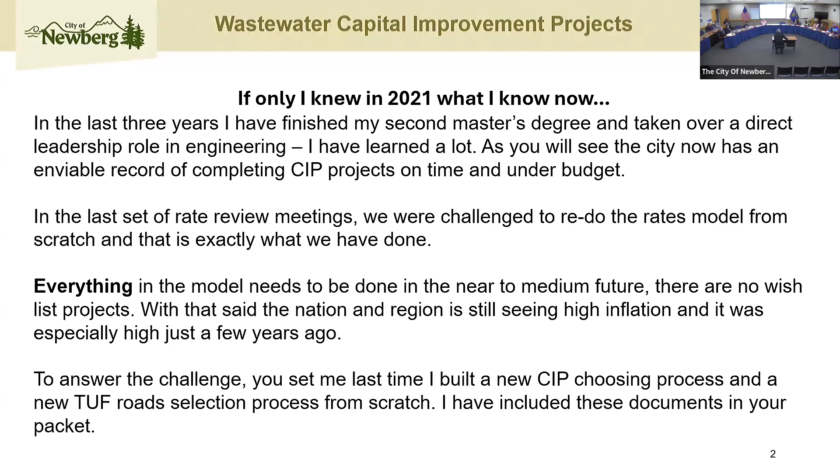To answer the challenge you have set me, we have built an entirely new capital improvement program choosing process from scratch, and that was in your packet, as well as a new TUF, that is transportation utility fee, road selection process, and I included those documents. One difference from this model and the last is that we have not cited specific projects beyond the first 5 years, except for the known factor of the needed water plant. We have put a placeholder for expenditures that we are sure will come, but we've not added granularity beyond the near-term 2 biennium horizon, because we cannot know what the priority will be. This is a more intelligent and flexible approach. It lets the city tackle things as they come up.

There will be no more adding projects that we may never need for a given decade. So perhaps you'll recall things like the redundant water intake have been removed, and other things that we cannot know for sure that we will need in the near future.

The city continues to work on debt reduction. If we can get rid of our current debt that heavily burdens wastewater, we can avoid adding more debt, the city can pay for infrastructure without interest, and that is a no-brainer. You may say, what progress has been made on debt reduction? The first item of debt has already been retired, and it's only 3 months early.

But the second piece of debt, the one that we've been working towards, the communications tower debt, is going to be paid off in May. That means we will be removing a line item from your utility bill, the communication line item, 2 years early. And then we're going to continue to work on the next piece of debt, and so on and so forth.

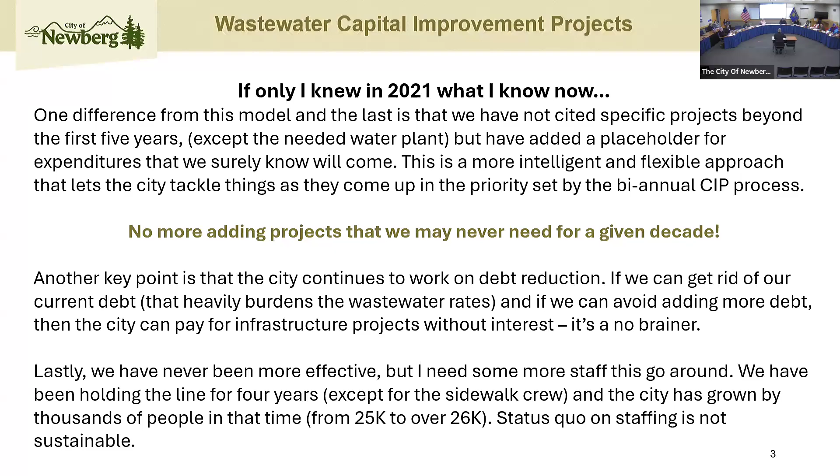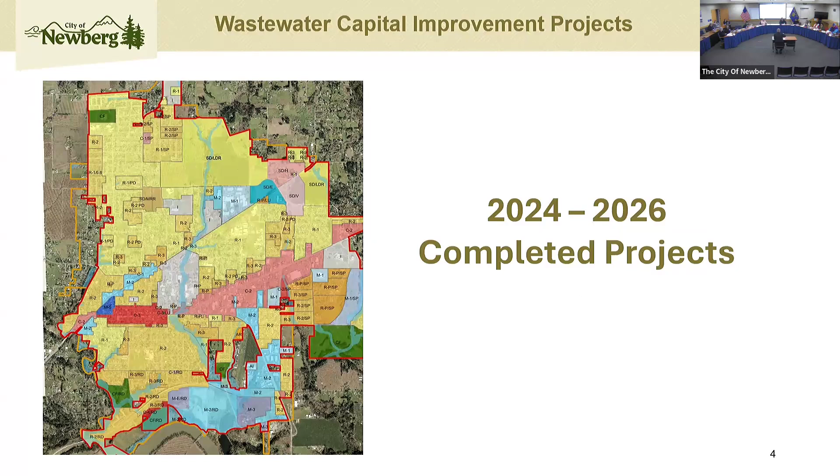First, completed projects. You are unaccustomed from previous meetings to hearing about completed projects, and now you'll get to hear about completed projects. The programmable logic controllers, which upgraded the wastewater plant. Expense total for the first biennium was just over $1 million. Its system development charge eligibility was unfortunately zero.

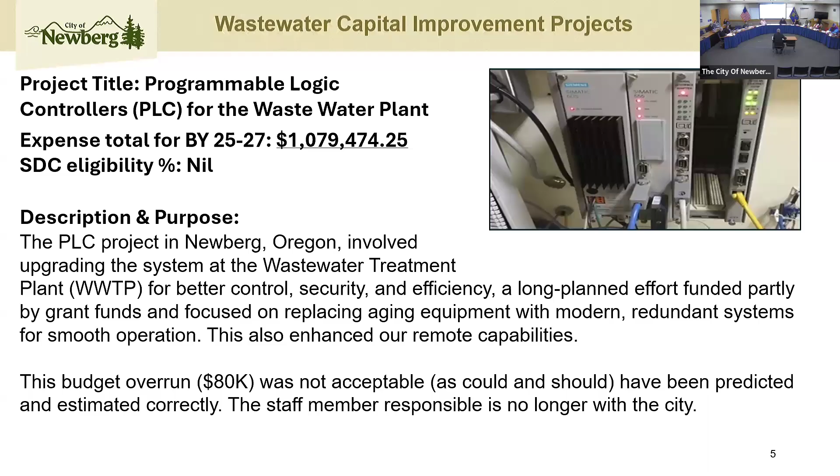It involved upgrading the system at the wastewater treatment plant, and this budget overrun, it was $80,000 over budget. It was not acceptable, and it could and should have been estimated more accurately, and the staff member in question no longer works for the city of Newberg.

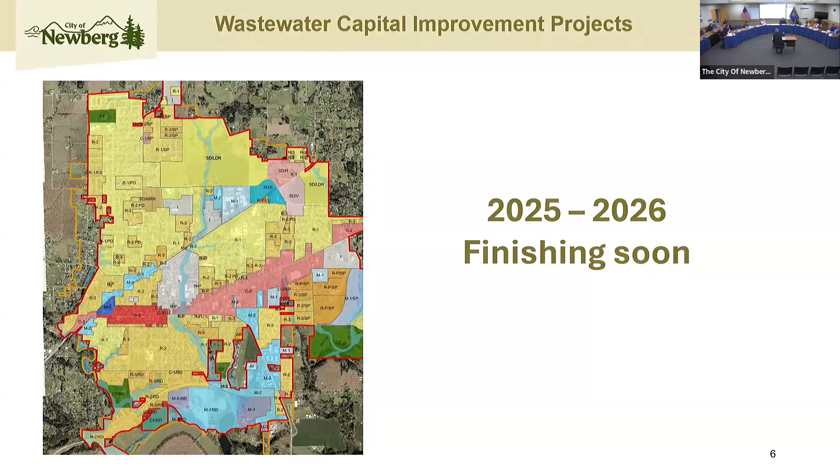And now, finishing soon. Each meeting, we're going to go through the ones we finished or are finishing soon, and then the future ones. The I&I study and report estimate expense total for the biennium is $340,000. SDC eligibility is nil. The I&I study refers to the city's inflow and infiltration.

This is critical because it will enable us to know where we should direct future I&I project dollars to do repairs. And we have finished collecting all of our flow meter data. We are compiling it right now, and we'll be working on that report. We've also completed another component of this, which is a smoke test, which has indicated some cross connections that we need to fix. And that will be coming to a wrap very soon.

The row of things you see lined up are flow meters, which we didn't have proper manuals for, but a former Intel employee that we hired, who is a genius, figured out how to make them work and communicate with our system effectively despite not having the right documentation. Thank you, Danny.

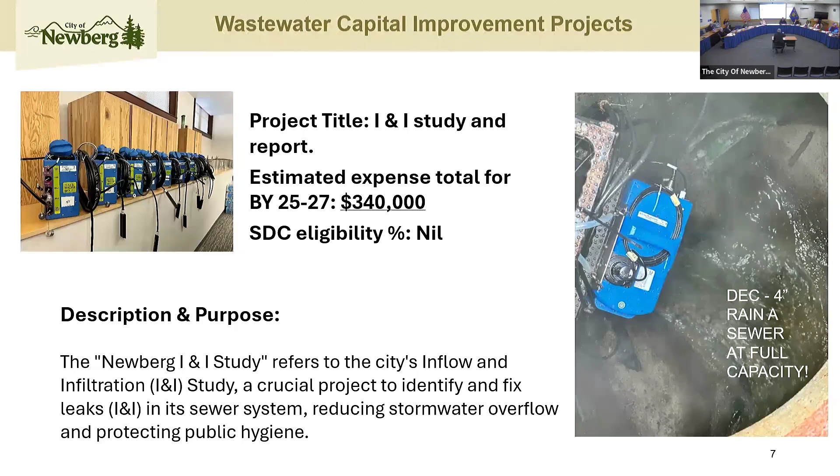Well, what do you mean by cross connection? Ned asked, what is a cross connection? That is where incorrectly the sewer line and the stormwater line are cross connected. Some cities only have one system. We're lucky enough to have two separate systems. And when they're cross connected, it increases our inflow and infiltration because water just flows directly into the sewer when there's a heavy rain.

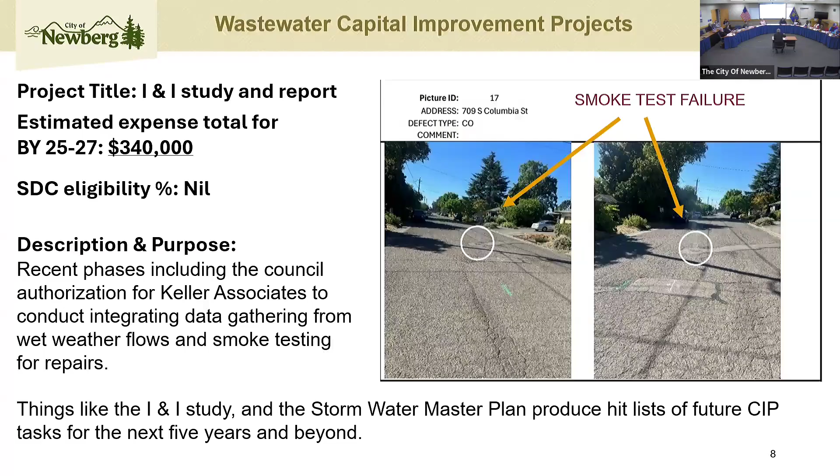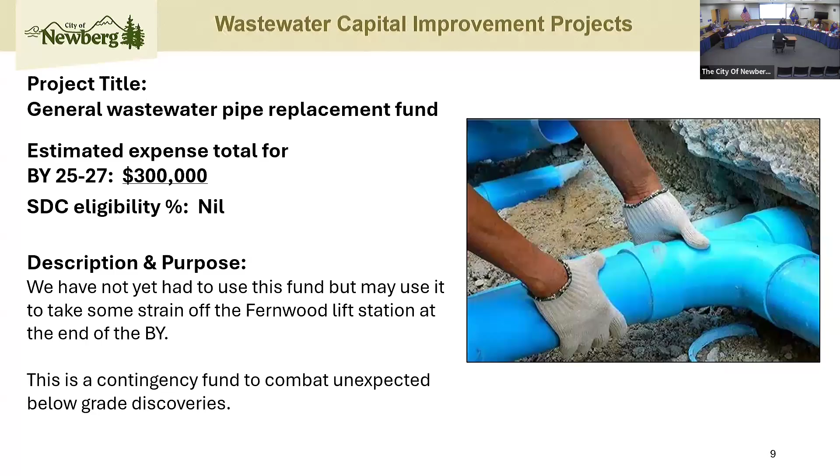We also are holding back $300,000 for general pipe replacement. We have not spent this money yet. It was budgeted for. This is in case of unexpected events. So if we lift the ground and the asphalt and find something that is worrisome, we'll have some wastewater money to deploy to fix that unexpected event. Hasn't happened as yet.

And one of the purposes of the Top Hats project, which will begin as soon as the weather dries up and will be finished by midsummer, is to fix 90-odd lateral connections so as to reduce infiltration flow into that particular sewer line. Do I believe that that will entirely fix that problem? I do not.

That sewer line is being surcharged by the new housing developments which we have added at Crestview Crossing, and Crestview Greens coming up soon. We're going to continue to see excessive loads entering that part of the system. So you're going to find out that we're going to actually be looking to replace a piece of the sewer

line. And one of the public works staff had the rather brilliant idea of putting a new sewer line down the side of the airport, down the side of the runway, so that we don't have to dig up so many roads to run the new line, because it will be cheaper. Now, this is a brand new idea that we're just exploring, but I've given you some information about it.

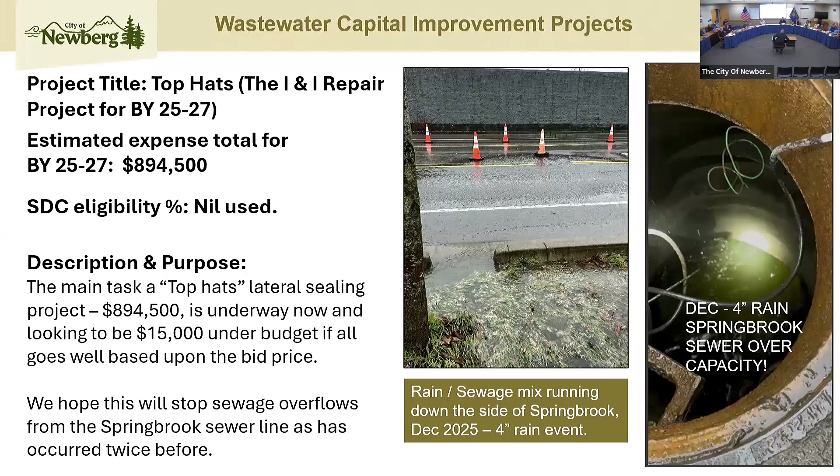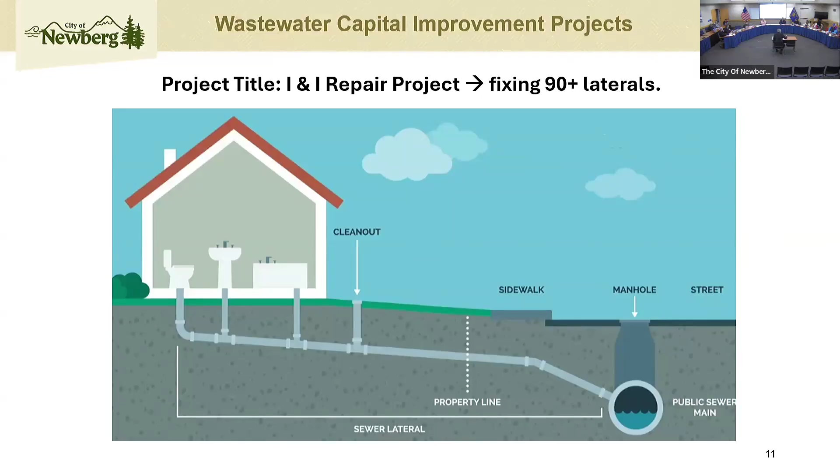And there is a quick graphic that I found illustrating what is a lateral. And as you know, we all have them in our houses, and this is going to seal some of them. And now I'm going to bring into focus some of our big projects, and these are for the near future. And as I say, we're only focusing tightly on the medium term.

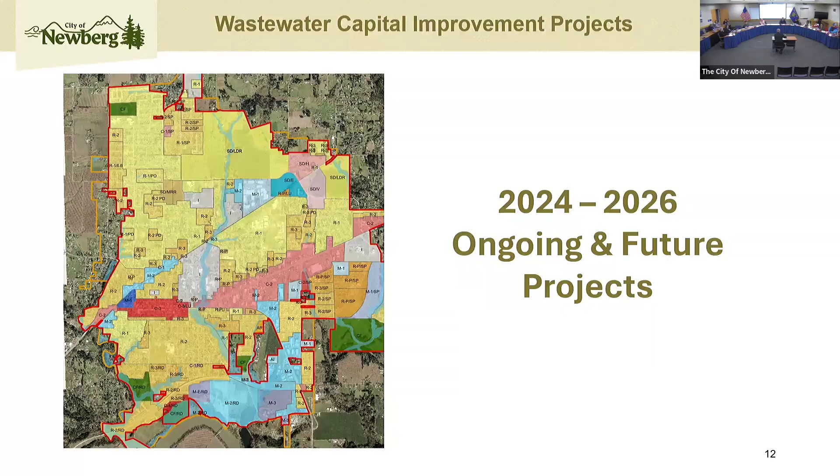This is the big one. However, I will say that thanks to the wisdom of keeping steady increases in our rates model, we have sufficient cash on hand to do this project between our SDCs and our wastewater fund. We can afford to build this thing. Now, I expected that this thing was going to need to be built in about 7 years. It was further out on the plan.

Well, our good friends with Oregon State sent us a letter, and the letter says that they expected that we were facing winter flows which were reaching capacity for this treatment plant. But not being one to simply trust our good friends in Salem, I ran a capacity study with Keller to get an independent answer. And unfortunately, the Keller result lined up with the state's analysis. Let me explain why we need to start this in this biennium.

If we do not start this soon, the next time we have to build a lift station, that will require a DEQ permit. They have the right to not give us any more permits if they believe that we have exceeded our winter flow capacity. What would that mean for Newberg?

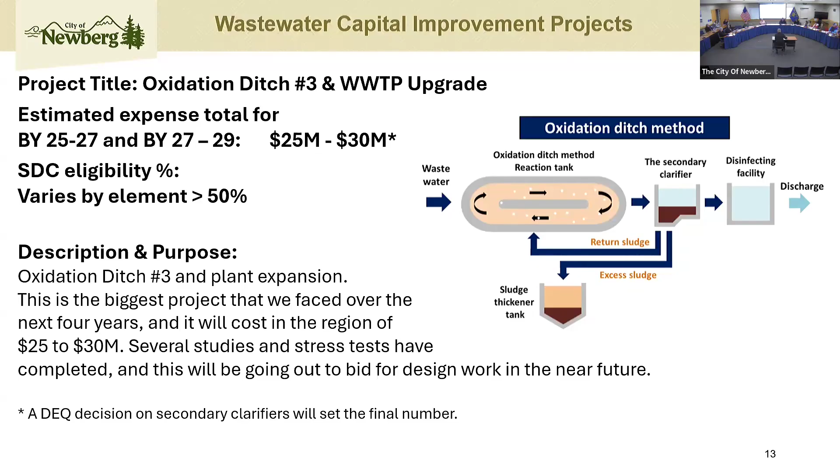Here's a bit more about the project. I just wanted to show you some of the site pictures. Now, to save another bit of money, we plan to redo some of the bays that are already there and add drying equipment to them. So we're not planning to use the drum dryer method. We're going to use the bay dryer method because we looked at 3 possible methods in an alternative study that Keller did, and so we're choosing the cheapest method.

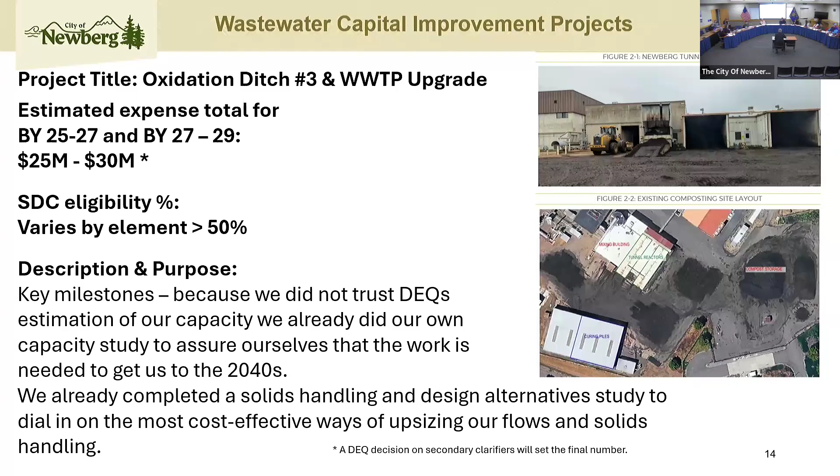Here's a bit more. Sorry to go on about this a bit, but this is just such a big deal that I thought it was important. The project will ultimately build another massive 300-foot concrete oxidation mixing ditch. It will have mixer paddles, another secondary clarifier, we hope not to, build compost bays, and that shouldn't say convincing, that should say conveying equipment for human waste. But it will also be convincing equipment for human waste because we will then give it away to the community mixed with sawdust, because that's what we do.

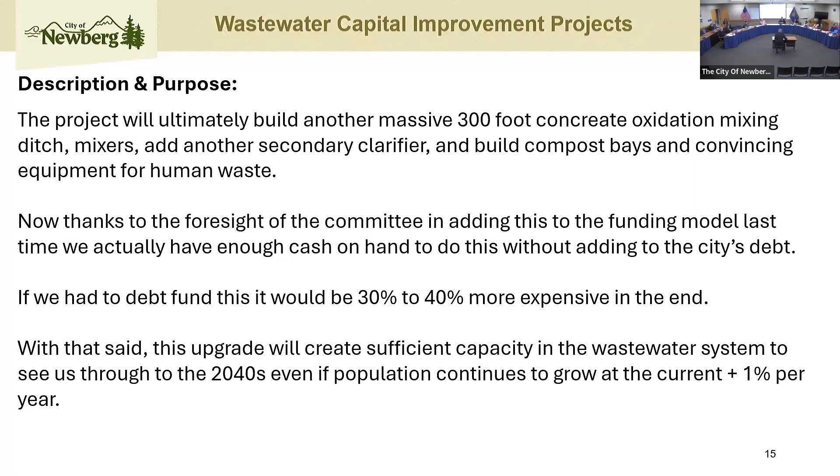Thanks to the foresight of the committee in adding this to the funding model, here's my thing. If we had had to debt fund this thing, the cost to the ratepayer would be 30 to 40% more than by paying for it by saving up the money. With that said, this upgrade will create sufficient capacity to carry us through to the 2040s, even if our population continues to grow at the current 1% per annum.

So that is the end of the capital projects. As you saw, it is a much reduced list from what you've been used to hearing, and they're all things we're about to do. All of the presentations will be like that. I will say that the package that sits before you is modest and conservative as staff were directed. We have rebuilt the rates model as described. Notably, this level of increase may or may not enable us to get more staff. And during the next 2 biennia, we must start to add more staff to keep up with population increases.

I've given you a handout that you certainly need not read this evening that explains the secondary ask. This time we're coming to you on wastewater with 2 price points. One includes an additional 50 cents per month, which we'll cover later. That is to enable us to fix that sewer line quicker. Otherwise, I have to do it at $500,000 a year. I would like to do it at $1 million a year so as to get it done in 3 years so we can stop leaking sewage. Otherwise, we're going to do a sewage surcharge every fall over a longer period of time.

It will take just under $2 million to build this pipeline. We think right now that is a wild estimate, because we haven't done the engineering study. But that will be by going through the soil near the airfield for most of the route in order to save the money. We're not making decisions tonight, but I ask you to study the documents because ultimately the decision about sewage will be yours. Are there any questions about my presentation whatsoever? We've all worked really hard on this.